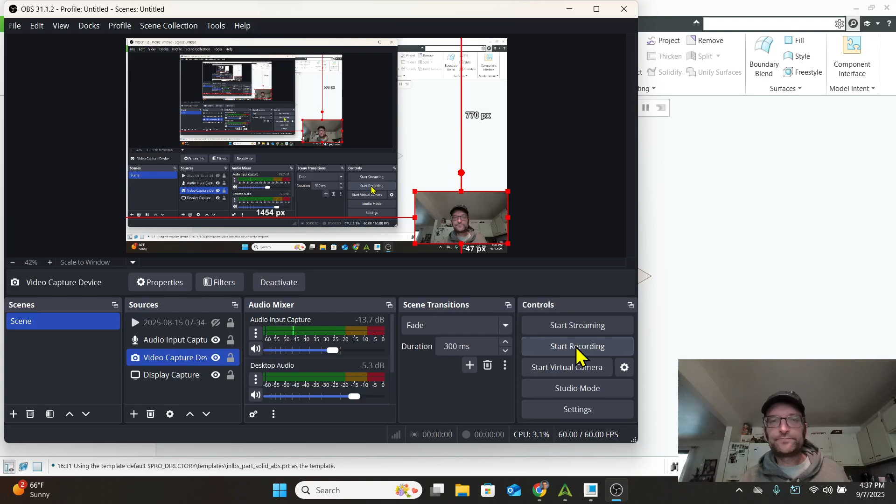All right, and here we are. It is just a week before our midterm exam is due. Our midterm exam is due here for the fall of 25 on September 13th at 11:59 p.m. for students at Elgin Community College. That leaves us about a week till the midpoint of our course, which over 8 weeks goes by very, very quickly. So the midterm is our next hurdle. So let's go ahead and take a look at it.

So here is the midterm exam. We can find that midterm exam on D2L by going to assignments, scrolling down to midterm exam, and clicking on the PDF attachment there to bring up this document. And first thing we're faced with is the 4 required elements of this midterm and their associated point values. All together, we're at 300 points out of our semester's possible 1,000 here. 4 components of this midterm.

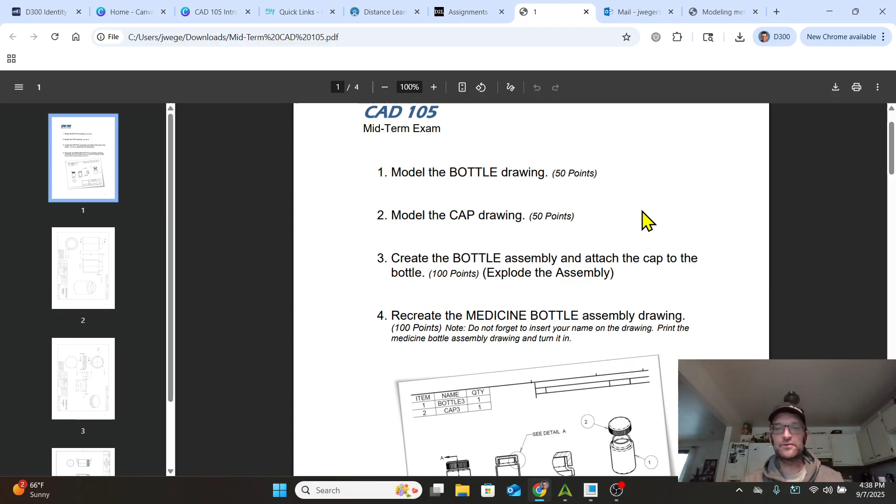The first being to model the bottle itself. That is 50 points. And then we're going to model the cap, another 50 points there. And we're going to create a bottle assembly from those 2 parts and then explode that assembly for 100 points rather on that one. That's pretty generous, 100 points for that part.

And the last part is to recreate this medicine bottle assembly drawing shown right here. And that to be done with the inclusion of your name so that I know who it is, and a couple of other new things in here as well. 100 points there, 100 points there, 50, 50, it gives us 300. So let's dig into it and take a look at it, starting with the bottle.

So the bottle itself is a hollow bottle. We're going to have what would look like a screw-on cap, much like a medicine type of bottle, a screw-on jar. But we're not going to be dealing with threads, thankfully, for a lot of you here. But we have a hollow bottle that has walls of 100 thousandths, max diameter here of the lower portion of 2 inches.

The upper portion is 1.5. Overall height to the shoulder here is 2.5, and the height of that shoulder where the cap would attach is 1/2 inch. And that's really all that we need to know, other than a couple of fillets on here. And there are a couple different ways to do this.

You could do a revolve. You could do a simple extrusion, create the bottom part, extrude, and then add another sketch to the center of the lower one and do that. Whichever way you want to do it. I'm going to do it as a revolve. I think it's probably the little bit more advanced or elegant way of doing it, but the choice is yours. Again, it doesn't matter how you get to the end, just as long as you get to the end and things are done correctly.

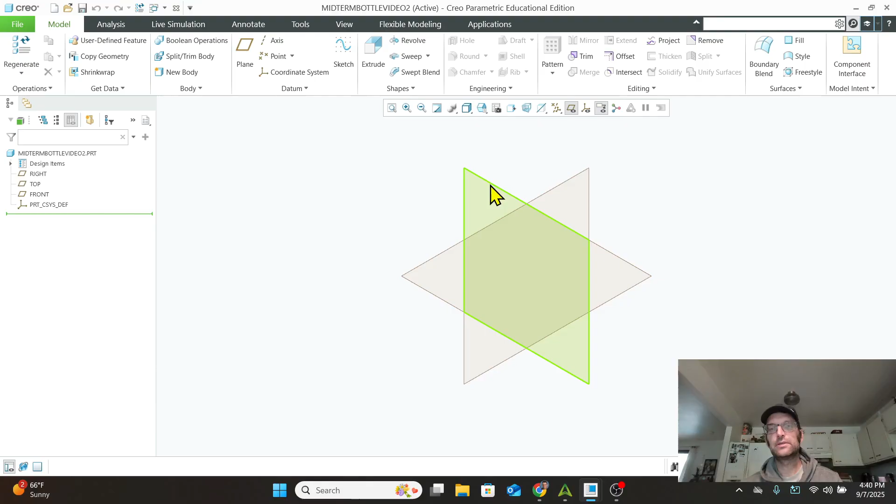Video 2. I started a video 1 before, and the cat went crazy, chasing things around the house that weren't there, playing with toys, and things kind of got sideways.

So we're starting over. All right, so we're going to start a sketch on the front plane. And we're going to change our viewpoint so that we can see the front. We're going to zoom in a bit. First thing is we're going to add a center line for that revolve feature. We're going to get into the line tool. We know our diameter of our part is going to be 2 inches overall. So that means a radius of that is going to be 1 inch.

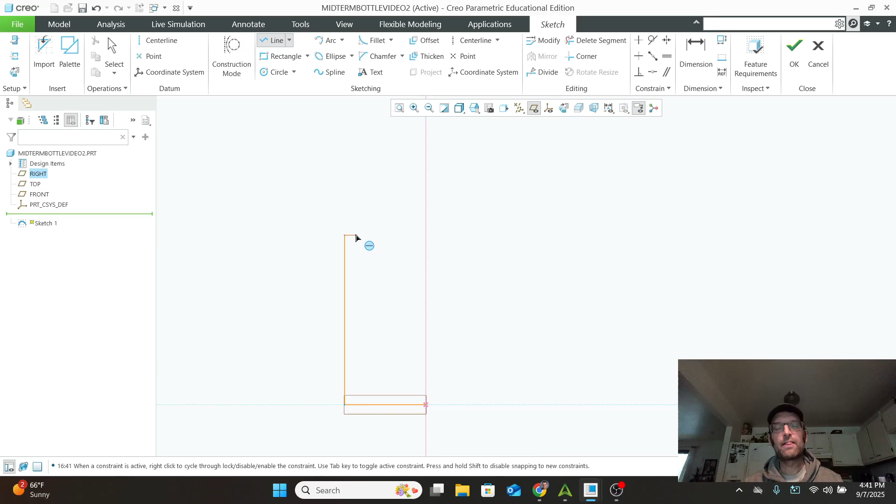And now we're just going to go and draw the rest of this thing. Whoop, not a center line. A regular line would be better. Get that looking pretty good to scale. Okay. Double click on that center to get out of there. So we know that this is supposed to be 2.5 tall. And this right here is 0.5.

And then we need some rounds. So our corners are rounded here, here, and here. I don't think the top was. Yep, nice and flat. So we have a round right here. Okay, we can see that right there. One right there, and then one right there.

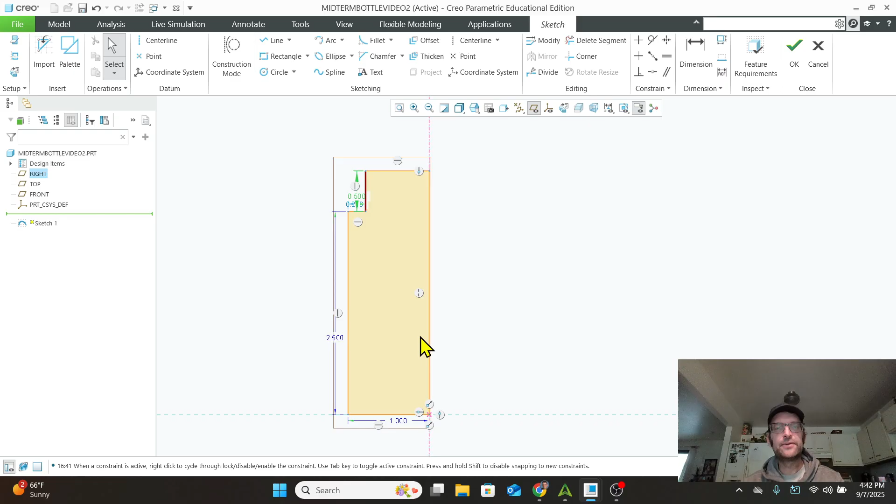All right, so let's add those three into our original sketch. It's probably just going to be a little bit quicker that way. So we get into our fillet. And then we're going to pick our two lines, set that radius, 0.5.

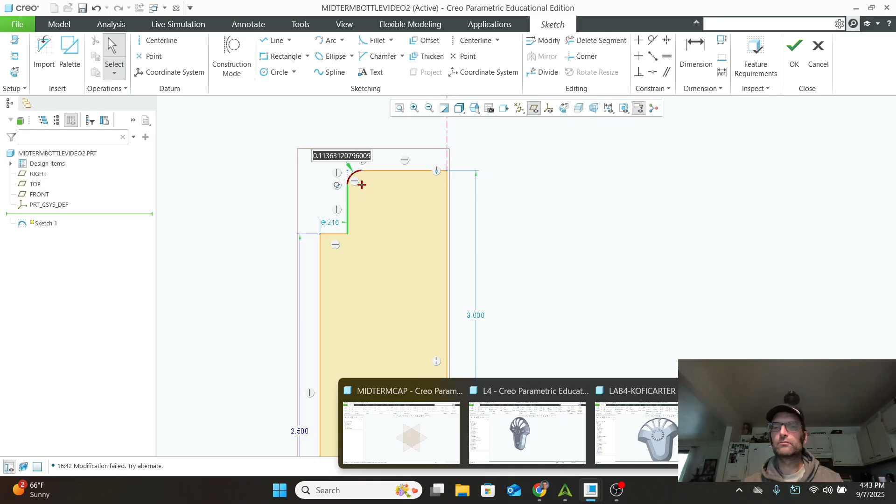Apparently the 0.5 isn't right because that's way too darn big. Yeah, it's 100 thousandths, 0.5 isn't going to work. That's what happens when you try to put in a round or a feature or make an edit to something that doesn't make sense mathematically. Creo's going to go, hey buddy, you sure you want to go ahead and do that?

All right, so let's add the rest of those fillets here and here. And we can go down here, fillet again, there and there. Let's zoom in and let's use our little cheat and do an equals.

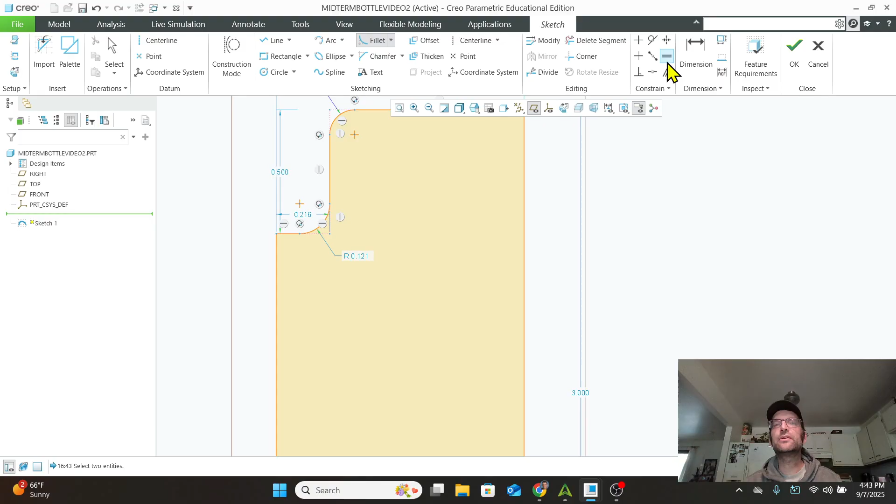So we're going to pick that, and we're going to make that one equal. So click the one you want to be essentially your master dimension, and then you're going to hit that equal sign first. The first one that's going to be the one that everything else is going to follow. And then you just go through and click on these other ones, and they're all going to follow that 0.1 so that they're all the same there. And we're going to hit OK on that sketch.

Let's go ahead and revolve that sketch. It's going to revolve around that center that we put there.

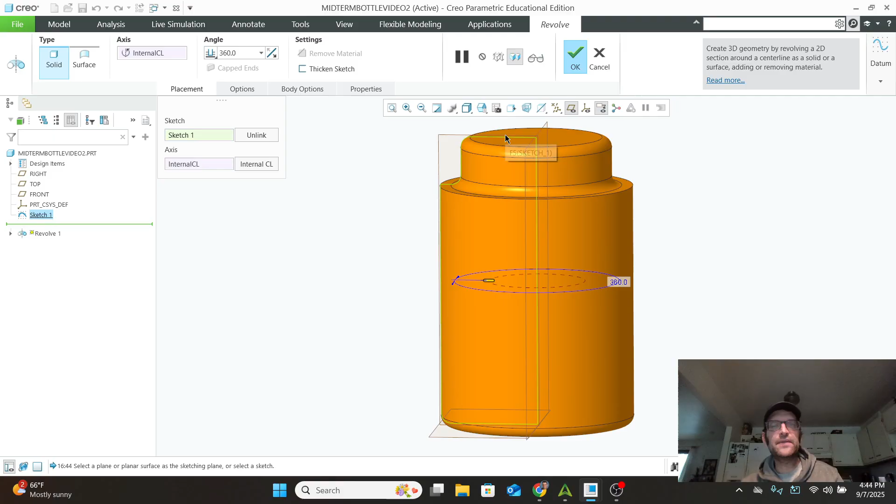Oh, look at that though. We put it at the top. We don't want that. So let's go back here. Let's hit OK on there. Let's go back, it's all right. We go back to the sketch and go back and edit there.

And that's gonna really cause us a problem though, isn't it? Because we're going to do a fillet there and there. It's gonna be 0.1. Okay, and then we're gonna have to come here and delete this one because...

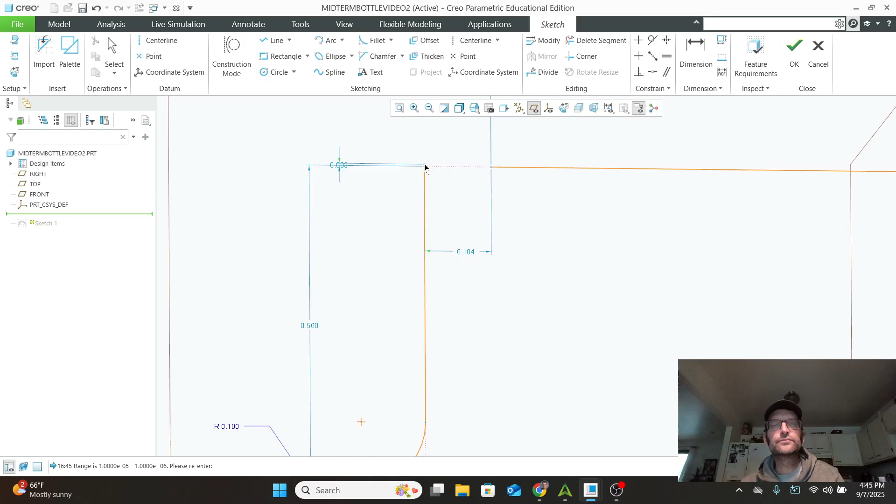Let's go ahead and add a line there. Boop, boop, close that thing off. All right, so now let's look at that and see if that looks better.

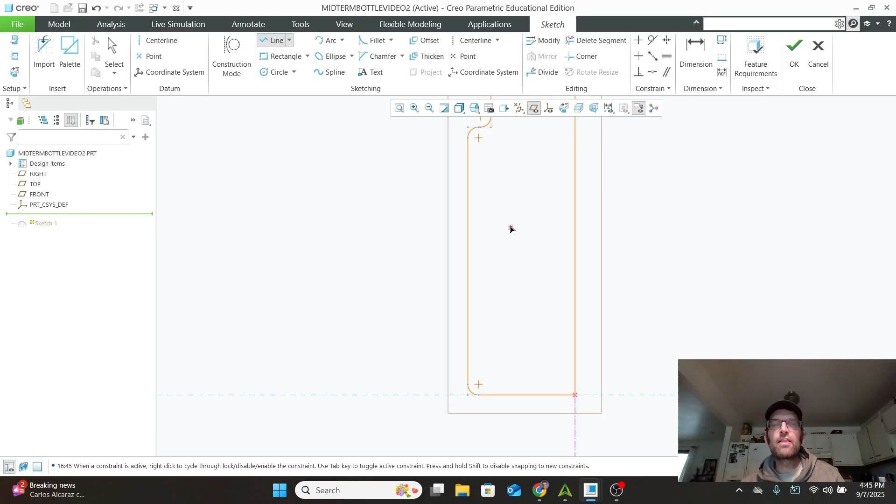Okay, so we still have 100, 100. Let's make sure that one at the bottom is 100 as well. That's 100 as well still. Okay, all right, so we got that. Hit the OK, updates our model.

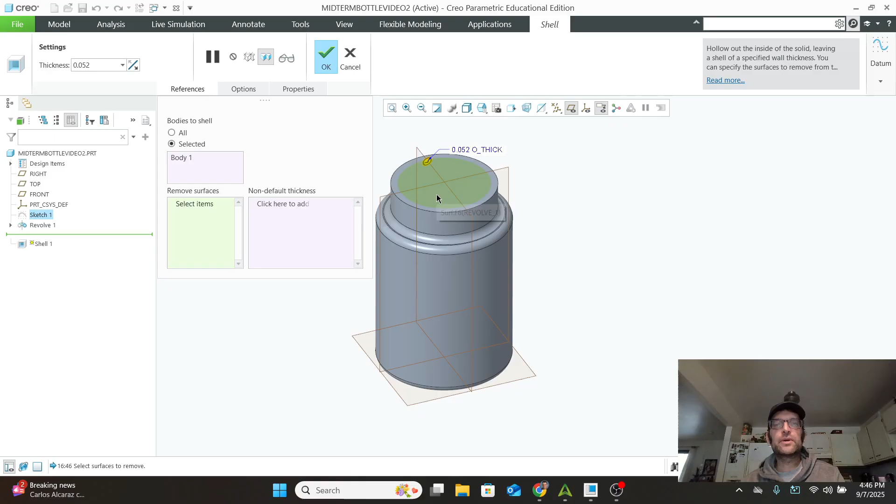Okay, there's our bottle so far, looking pretty good. We just got to go ahead and shell that thing, hollow it out. We're going to click on that open face on the top there where we want that hole to be. We're going to go to our options, properties here, and we're going to change that thickness to 100 thousandths. We're going to hit OK and turn off that, and we are good. We have a bottle, it is hollow. It has fillets in the places, rounds in the places that it's supposed to. So that is good. All right, part one is done.

Let us go to the cap. All right, so looking at the cap, we have a couple things going on here. We have an overall diameter of 1.9. So the widest here, we have a center opening of 1.5 inches. It's going to fit over the top of that bottle. We have a diameter of 1.8 from here to here.

And then we have a pattern of rounds, 50 of them, which are going to travel around here, so that we have that like knurling, that texture on there, so that when we go to open up the cap, we have something to grab onto. So we're going to create that with an axis pattern, would probably be the best way to do that.

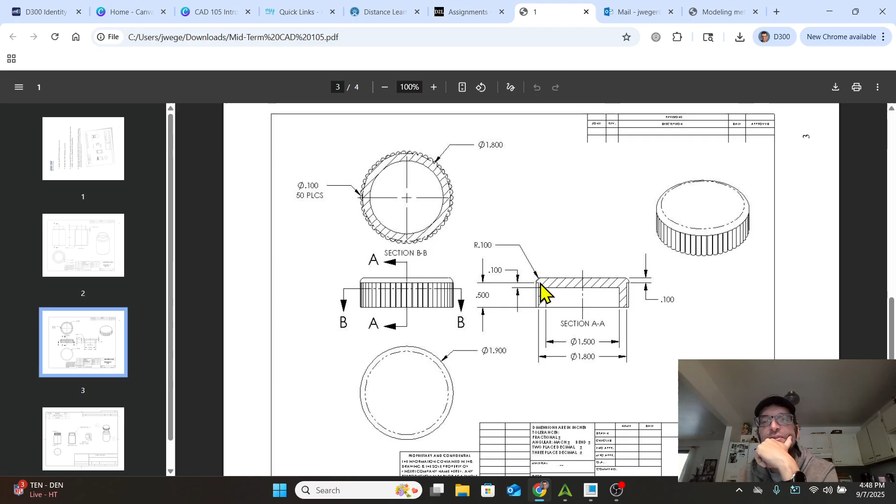And we have a thickness overall of 1/2 inch, so 1/2 inch from there to there. And then we've got, let's see here, we've got 1/2 inch there. And then we have 100 thousandths there to there, and 100 thousandths from the top of that to there, where that opening is. All right, so let's start off.

We need 1.8, and then those circles of a diameter of 100 thousandths, so 1.8. Let's go. And we have a new file, a new part file, midterm cap.

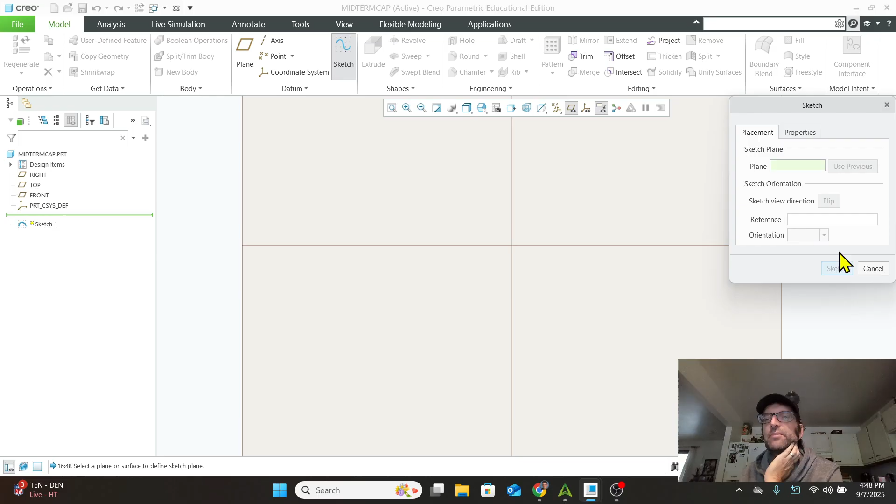I'm going to turn my planes back on. I'm going to go ahead and get myself to... let's go to the top this time. I'm going to draw on the top this time. All right, and let's get into a sketch. That's going to be on that plane right there.

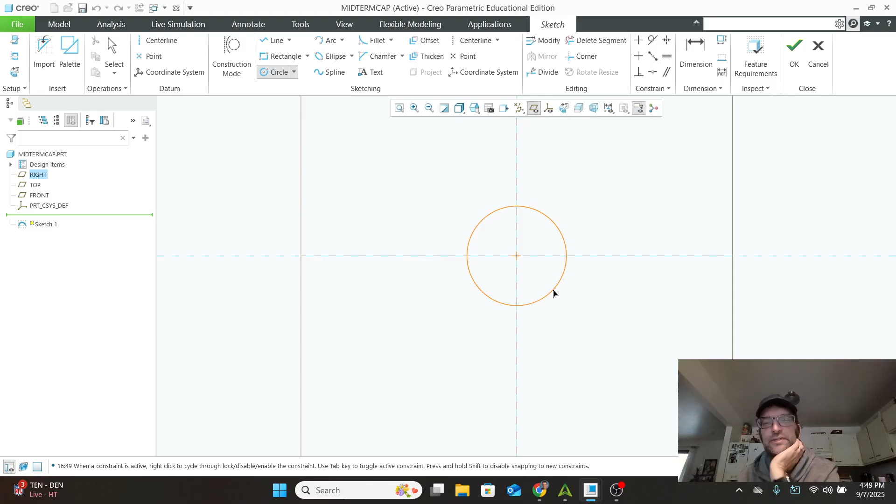Oh, we're already into the sketch. That would probably be helpful there. All right, so we're sketching on the top. All right, let's get in here. Let's get a center diameter circle. Go right onto that origin there. And we're going to set that. Circle, left click to start, left click to end, double center. Make that a little bit smaller at 1.8 inches.

Let's go in and let's set up this pattern now. All right, so we're going to do another center. And let's double click on that. So it's supposed to be 100 thousandths.

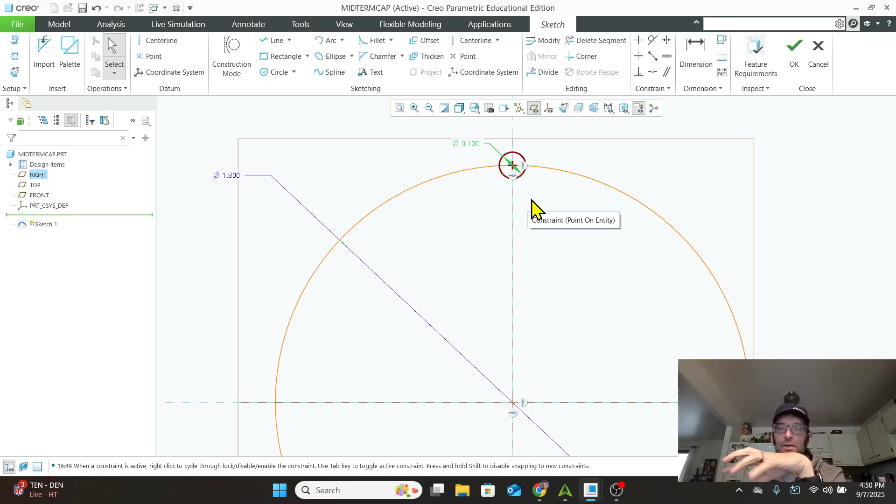Okay, let's go ahead and trim this guy off. So we can either pattern this in our sketch and sketch out those 50 instances, or we could do it, extrude it now, and then go ahead and copy that feature on there. I'm just going to go ahead and do it in the sketch. So let's clean things up a little bit, delete this segment because we don't want that. We don't want that one there, and we don't want that in there or that there. We want that nice and open.

Which way is going to be harder though? I think we're going to have to do a lot more work if we do it inside the sketch. Let's go ahead, let's hit OK. Let's extrude.

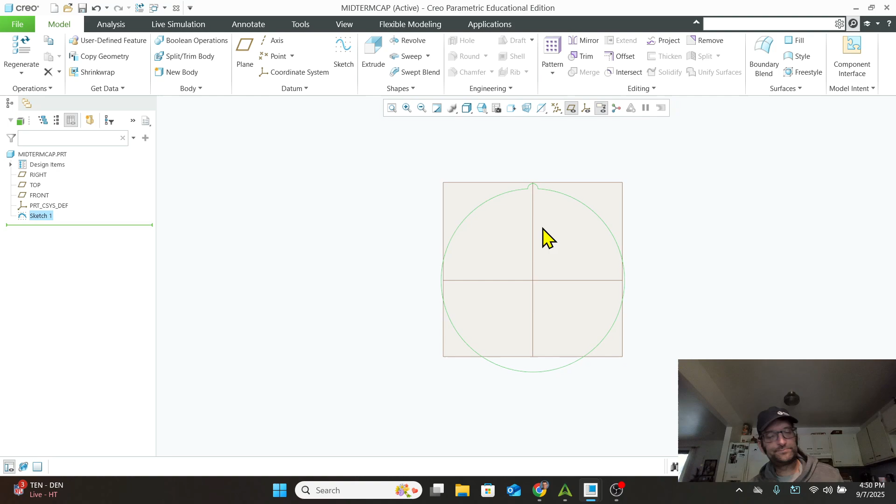Let's do something else here. Let's do that sketch again on this top plane. And let's just create - we're all about efficiency. If we do the sketch and go through that way, we're going to have to edit a whole lot of circular features and cut out and just do all kinds of extra work. So let's take this the quick way. Sometimes it's fun to take the long route, but we're going for easy today. Let's get this thing done.

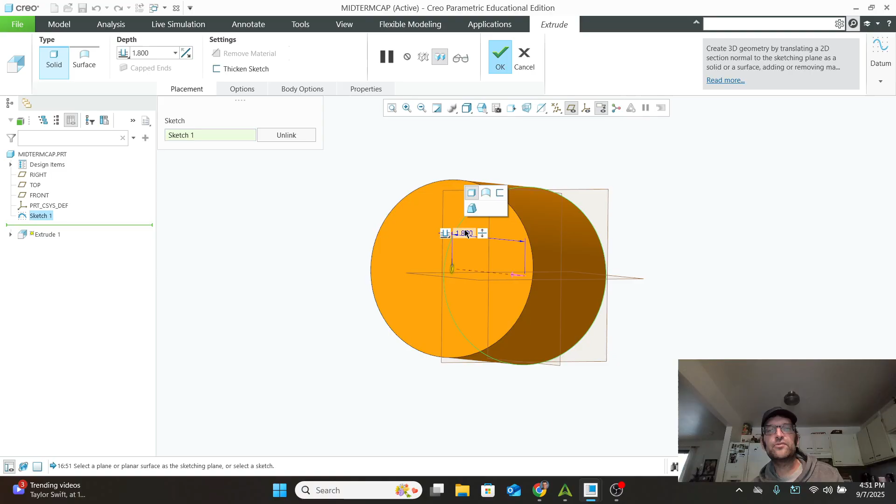Let's go ahead and extrude that thing to a thickness of, what was it, 1/2 inch? Pretty sure that's what it was. Let's make sure - so 1/2 inch for right there. Yep, 1/2 inch. So 1/2 inch, 0.5, enter. We're going to hit OK. We're going to go back to that top view.

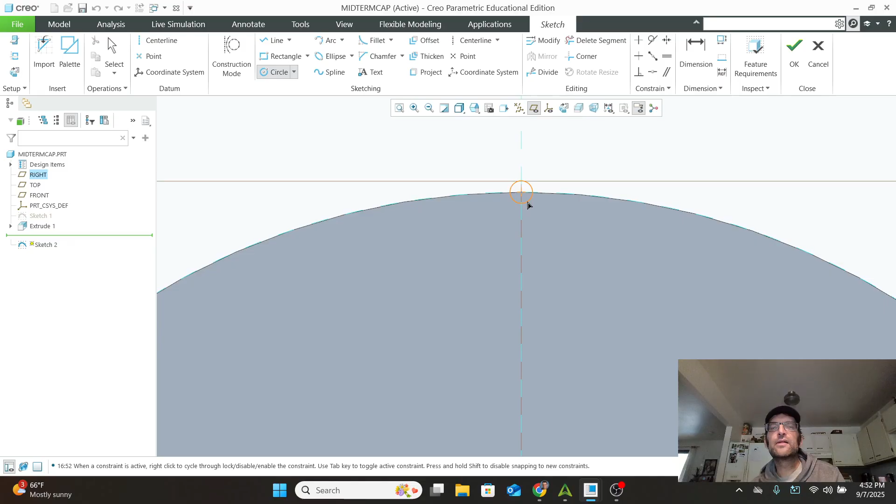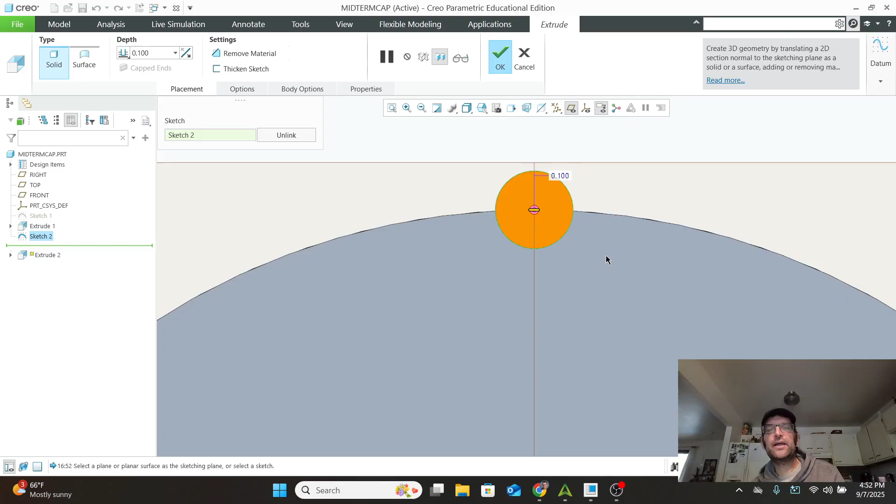And we're going to go create a new sketch right on top here. Okay, and we're going to draw a center circle, left click, go 100 thousandths. Let's go ahead and hit OK there. Let's extrude that guy. Let's go back that way. We're going to go 1/2 inch. We're going to hit OK.

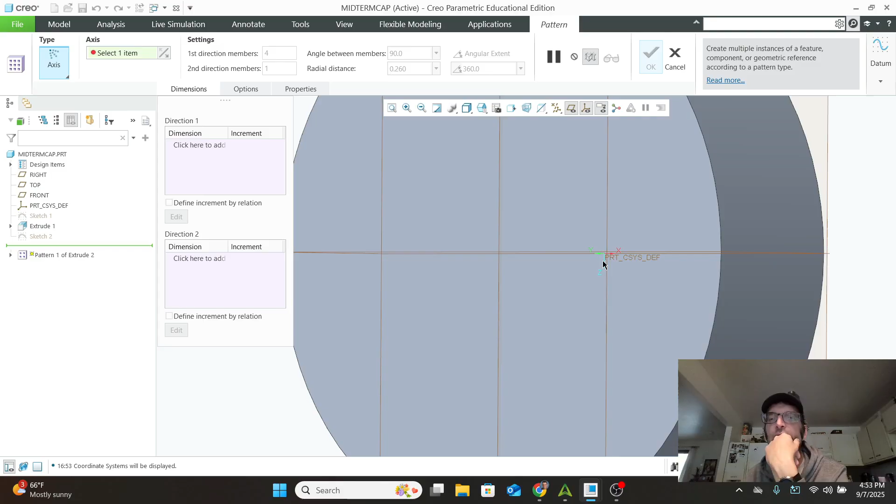And then let's go ahead and let's make a pattern from that extrusion. So let's make sure that extrusion 2 is highlighted. Let's go back to our top view so we can get a good look at that. Got extrusion 2, we're going to do a pattern. We want to do an axis pattern. Okay, and let's turn on CSYS. So we're going to grab an axis because the first thing it wants us to do is tell it what axis - I'm going to choose the Y.

Okay, go back over here. How many instances do we want? We want 50 of those. So the distance between those is going to be 360 degrees in the circle divided by 50. 50 instances, center is at y-axis. We see the 50, the preview of that there. And let's go - okay, boom. There we go, all right.

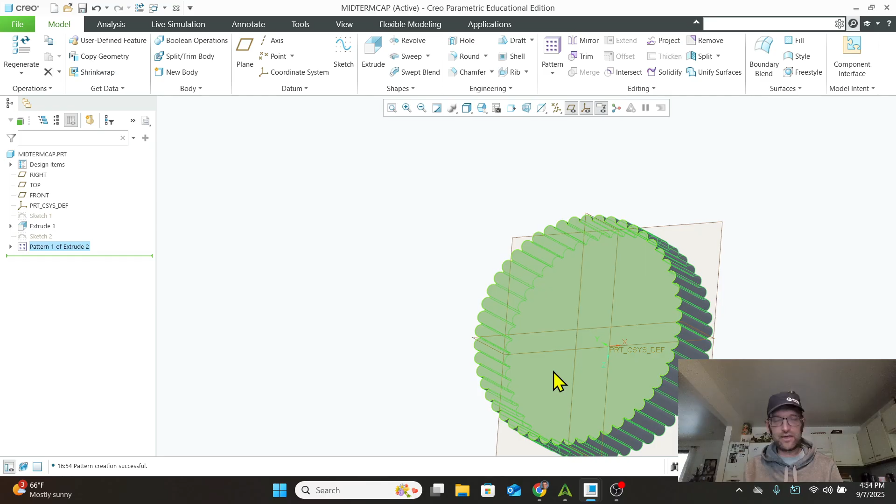So we got that texture on the side. Very nice. Let's go ahead and go back to the top so we can see that nice top view. I think I've probably had enough of looking at the CSYS - it's really all I needed for there, and also the plane.

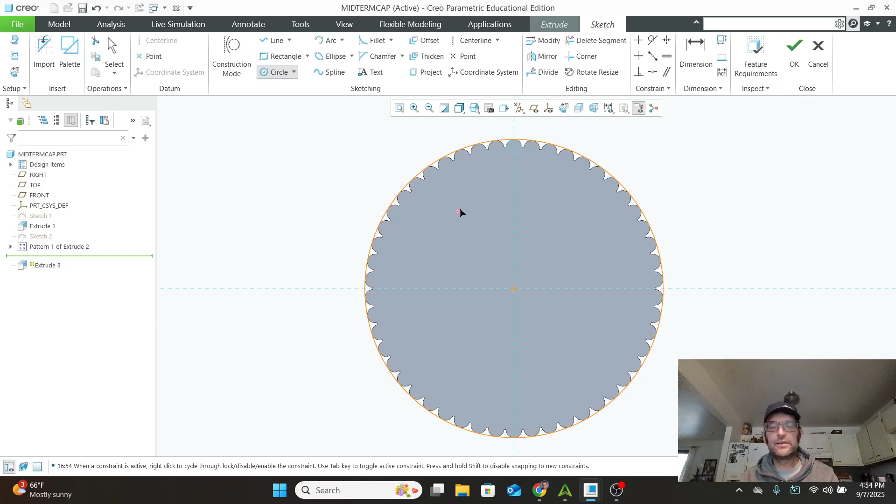So let's do another extrusion. We're going to do that right on top of here. The circle that we're going to extrude, it's going to be 1.9 diameter, which is going to be that 100 thousandths plus the 1.8 from here across to there, right? Or we could just click and we'll grab that quadrant point of that circle instead of putting that dimension in. I'm going to hit OK. And there we go - it's going to try and extrude it to 1.9.

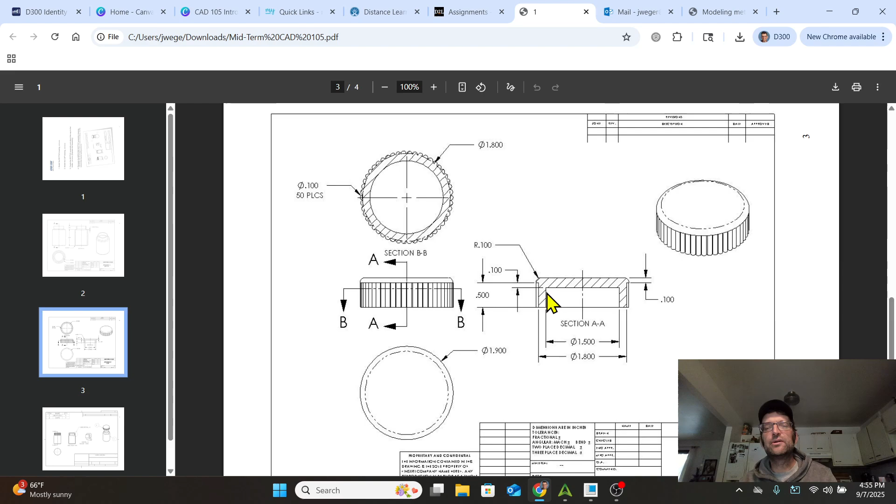We don't want a cap that's quite that thick, though. Let's double check - I think it was 100 thousandths. It is 100 thousandths, 100 thousandths with a radius on there too, so with a round on there as well. Okay, so let's get that in there - so we're 100 thousandths here. 0.1, enter, let's hit OK. Those two are going to join together.

Let's go ahead and add a round to this edge. That radius is going to be 100 thousandths. There we go, we got our cap.

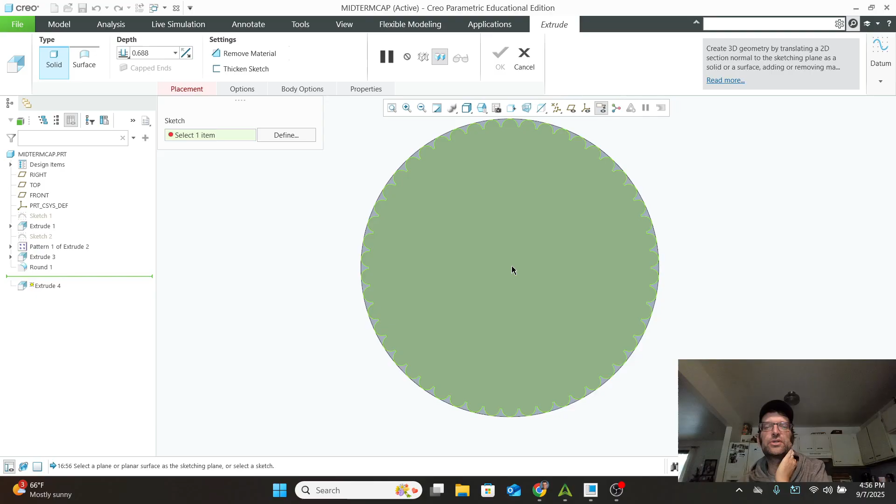We do need to put a hole in the middle of this. So let's look at this from the bottom, so we're looking nice and straight on. Let's go ahead and do an extrusion on this face. We're going to go right at center. I'm going to do a circle.

That dimension of that circle is going to be 1.5 wide to fit over the cap. And then the depth of that, we have 100 thousandths from here to here, and then from here to that start point there is another 100 thousandths. So we have 200 thousandths subtracted from our 0.5 plus our 0.1, so 400 thousandths on the depth, right? Or we could just go 0.5 minus 0.1, would probably be the easier way to do it. But there we go - so 400 thousandths, 1.5 inch diameter on that one.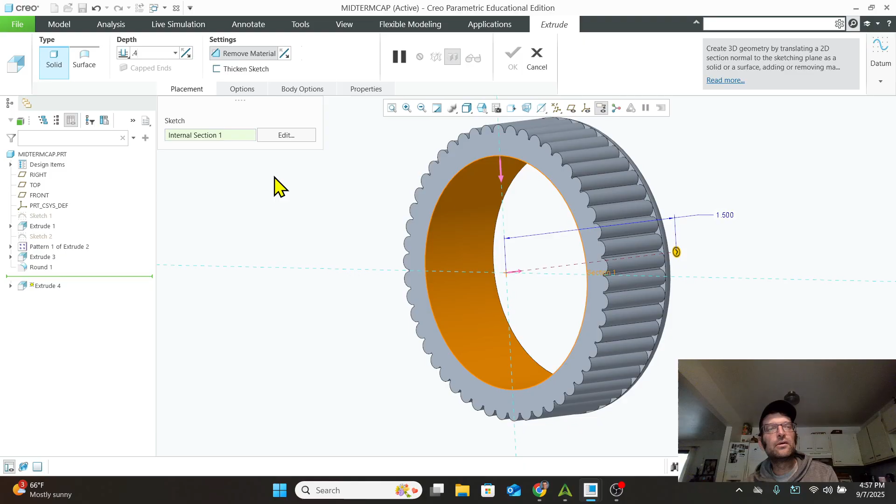All right, so let's double click there. We got 1.5 diameter, we hit OK. Get our extrusion, going to be 0.4. We're going to flip the direction around so that we are taking that out, only 0.4 though. 0.4, we're going to remove material and we're going to hit OK. And there is, ladies and gentlemen, our cap for our bottle.

All right, let's go ahead and make sure we save that.

I'm going to get that into a different place, and I would suggest you put these into the same place. We want to start a folder because we're going to do an assembly, so we want those parts in that assembly folder. We also want to put the assembly file in there, and then we'll put the drawing file, all in the same spot.

I'm going to make a new folder and call it Midterm Video. I'm going to save the midterm cap there, then go ahead and get into my bottle, and save that one into Midterm Video as well. Hit OK there, and I have those two things done. All right, so those two are nice and done. That's 100 points - we're a third of the way there.

Next 100 is going to be for the assembly. Always an interruption - somebody walking by in front of the house, the dog's got to let them know, not in my neighborhood kind of thing.

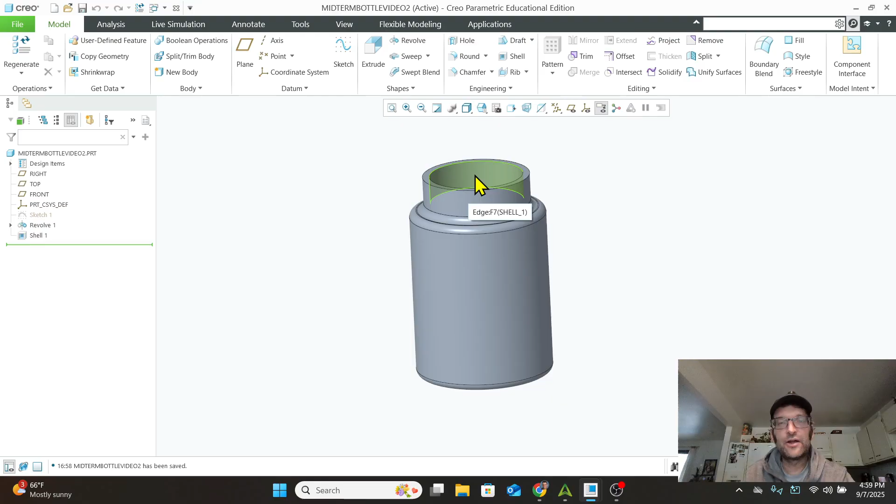So here we go, we've got our first 100 points done. Next one is going to be for the assembly. File, new assembly. Call it bottle assembly video.

Here we go, we're going to do a bottom-up assembly because we're creating it from existing components. We're going to start off right here. First part we're going to grab is the Creo file, which is going to be our midterm bottle part. We're going to open that one.

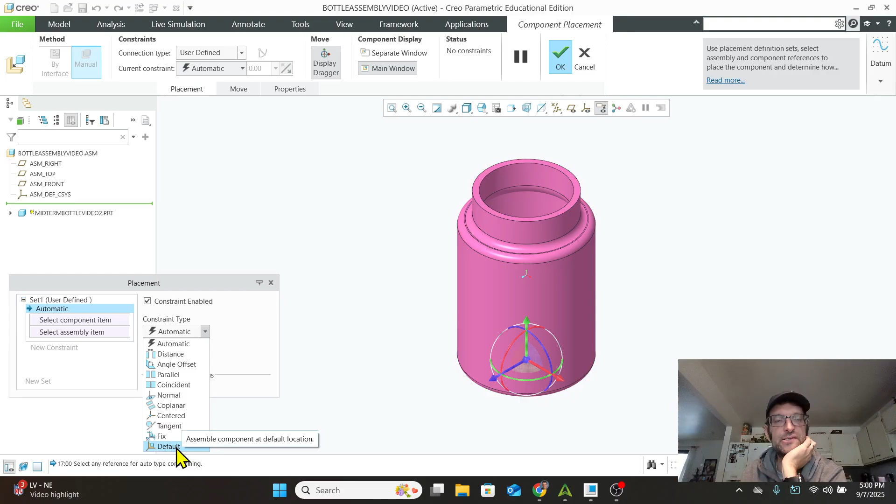Remember, when we add this and put this in, when we're creating these assemblies - when we set this up by doing the revolve and setting up the cap right on the top, and this was on the front as a revolve - those things are already aligned and lined up around the origin, the CSYS. But just good practice is to go ahead and go to default for this one. We're going to hit OK and drop the bottle in. Okay, got the bottle there.

Then let's go ahead and grab our second part, which is going to be the cap. We're going to hit open. And if we flip that guy over to default, notice that it disappears because they're right over each other. Isn't that convenient? But we can leave it, I just want you to see how that is, and why that benefits you.

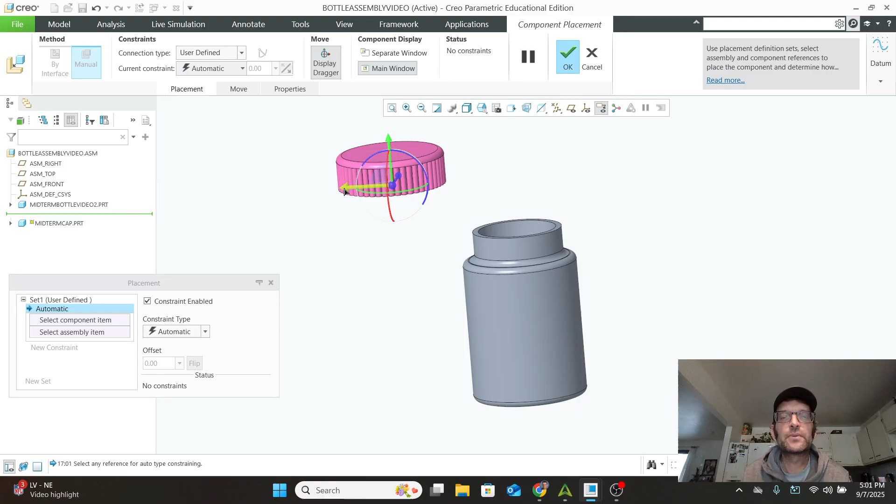I'm going to hit Control Z and not do it that way though. But we have this one on default. We're going to get this one generally into the location. Remember, we have those 6 degrees of freedom, those 6 axes in which we've got to go ahead and limit our motion on things. So we want this over here, and we're going to go ahead and set up that as a constraint.

So those are coincident. Then we're going to go ahead and say we want an additional constraint, so click on New Constraint. We're going to click on the top face in here, scroll down, and click on the top face of that bottle. And that's going to be coincident - they're going to sit right on top of each other.

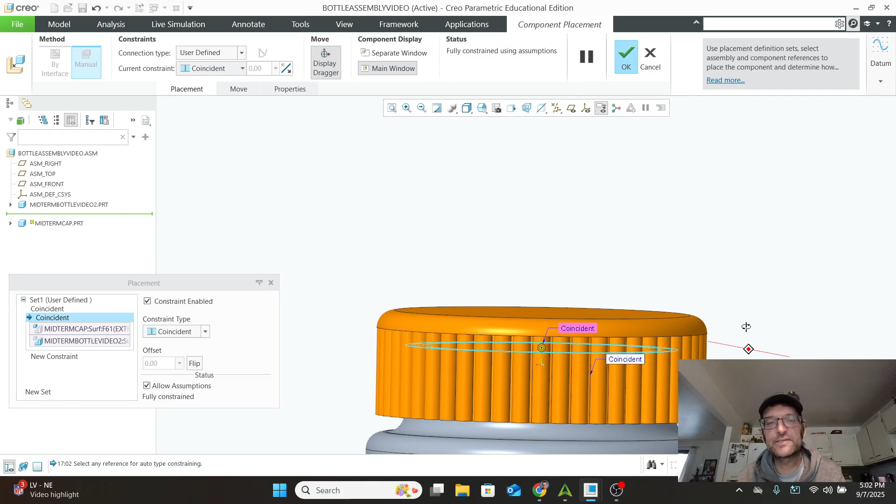Very nice. Sometimes remember that we'll go in there as a distance one and leave them set apart from each other - you can just go ahead and use the distance one and set the distance to 0. Whichever way you want to do it, coincident or distance of 0, it all gets us the same thing. So there we go, we have the assembly, more or less. We just need to go ahead and do something with that, right? So we have to go ahead and do an exploded view on that.

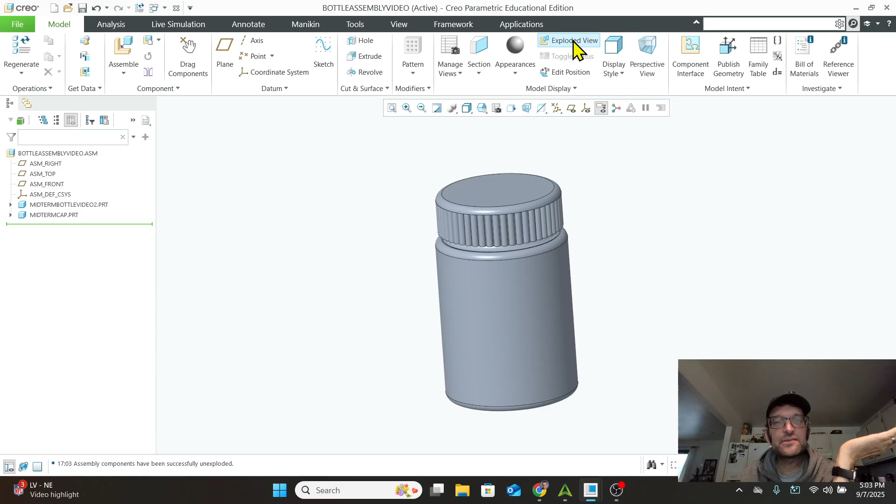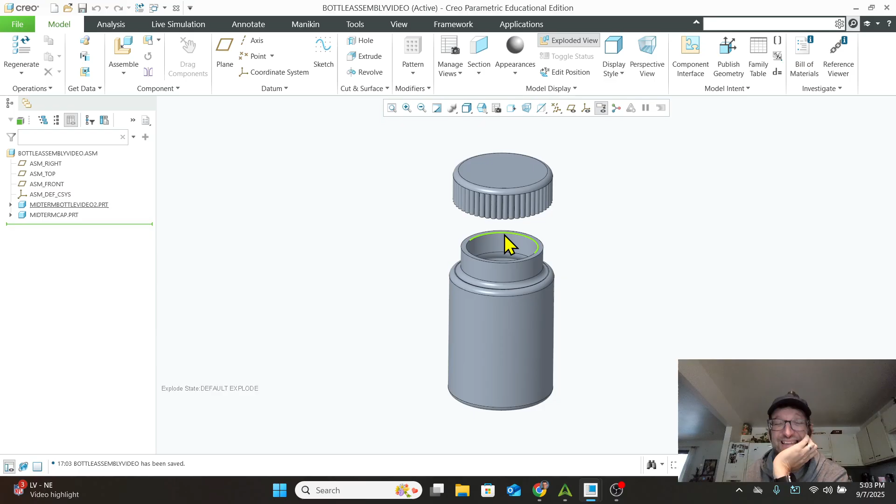Okay, real nice, all we got to do is click it. Creo does a good job for us. That's nice, that's beautiful, fantastic. Good, okay, make sure we save that. We save it into that folder that we created with our other stuff in there. So that is there, that is done. That right there, ladies and gentlemen, is 100 points of this midterm. So we're 200 points down.

All right, last 100 points. Here we go into the drawing. So we need to recreate this drawing. So what do we need here? We need to zoom out a little bit so we can see everything at once. So here is our primary view, right? We need to set up a multi-view drawing here.

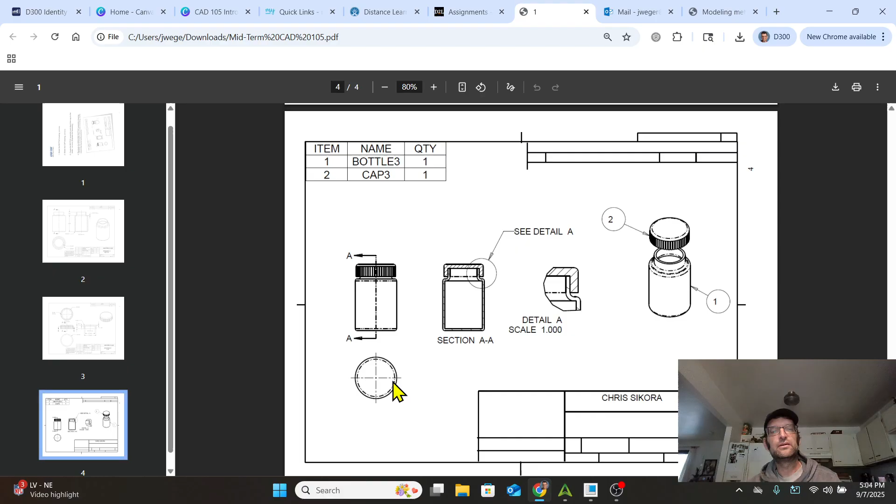Really, we're not doing a whole lot - we're just kind of doing a main view right here, a most descriptive view. Then down below it, we have a top view, or a bottom view in this case rather, which either one of those is going to look very similar. Notice that it does have a center mark on there, so we do need to include that. And we are sectioning, doing a sectional view of this view here, showing this to the right of that.

So that means we're going to project a view over here, and then we're going to create a section using this parting line. And then we're going to do a detail view of this joint between the cap and the bottle, just to show that in a little bit further detail. Then we're going to include that exploded view of the assembly over here.

And then we're going to add balloons for the parts, and we're going to add a bill of materials or a list of those parts there. I'm just going to do that simply by manual ways. So we got to create a drawing from those things. So let's go ahead, back into Creo, File, New. We're going to do a drawing, and we're going to call this the Midterm Bottle.

And we're going to use, I'm going to uncheck that default template. Nope, I'm going to give it a better name that hasn't been used before and call it video. We're going to use a template, excuse me. Nope, cancel, nope, cancel. Yes, we're going to start that again.

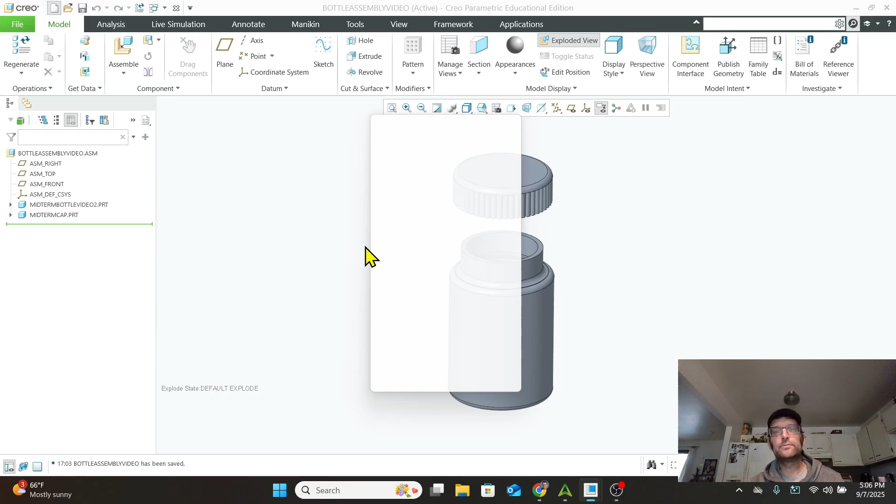File, new, drawing, model, assembly, video. We're going to do empty with format. We're going to choose the A size. We're going to hit OK. And we should have this A size sheet that comes up right here.

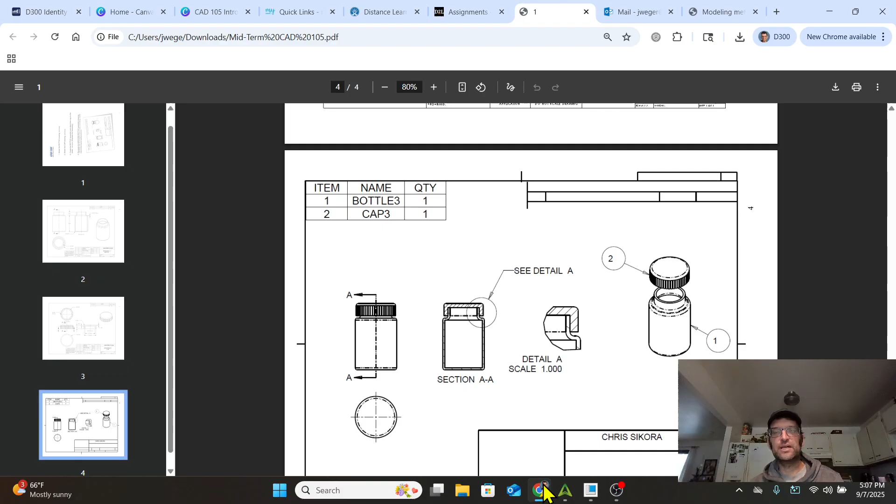All right, so first thing we need to do is we need to place a general view. We're going to default all of those. We're going to click where we want that to be approximately. Remember, we're going to have probably about the center of the page there. We're going to change that view. We're going to leave that scale. Let's look at the scale of this one. I would say that's probably half scale in there. So we're going to stick with what Creo suggests on this one.

We're going to change to that front view. We're going to apply that, and then we're going to go to View Display. And we're going to change from Follow Environment to No Hidden. And then Tangent Edges Display Style is going to be Phantom. We're going to apply that, and we're going to see our bottle look like that. All right. All right, so far so good.

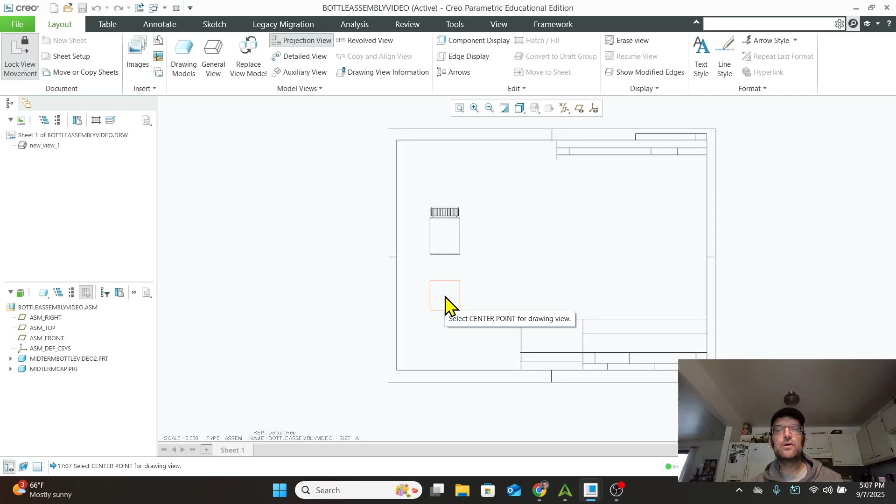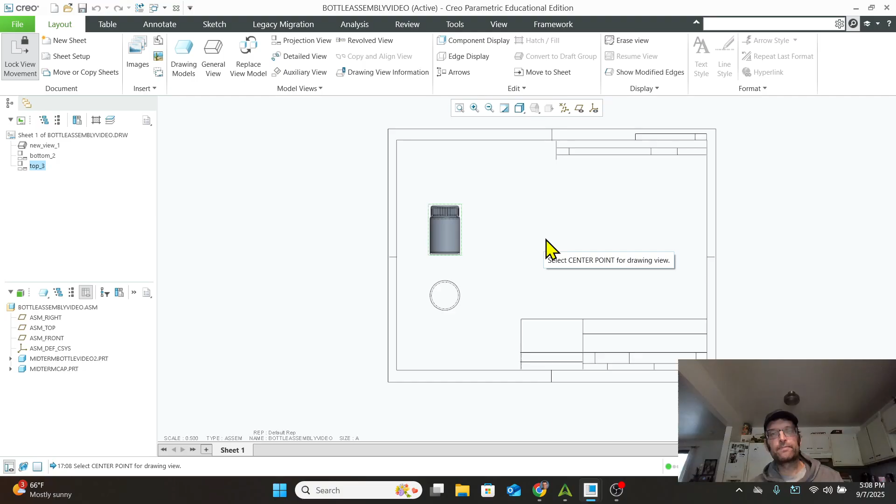Let's go ahead and project some views here. From here, we're going to go down and show the bottom. And then from here, now let's just go ahead and set that up. Display, we're going to do the same thing. No hidden. Phantom. Apply, hit OK. Project again. There. Okay, so project. Oh, let's regenerate that. There we go.

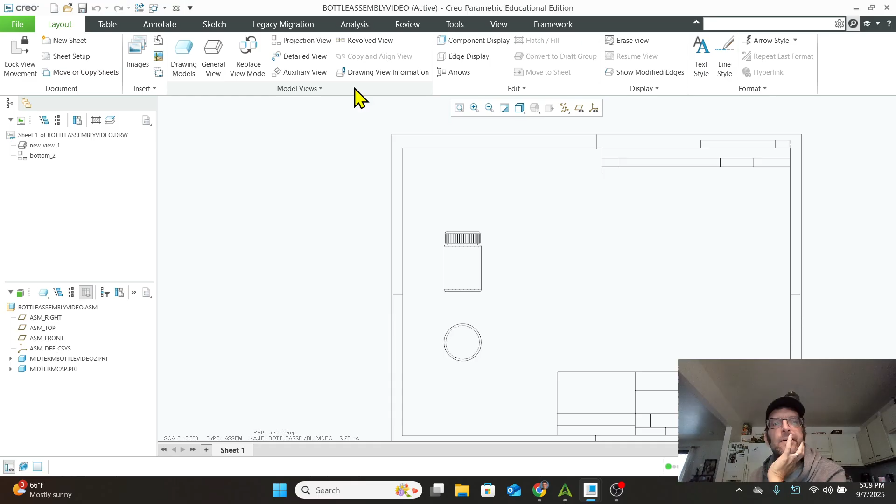It's the quick way. Oh, and lock view movement is on right now, so we can't move anything else. Make sure you turn that off so that if you want to, you can move your views around the screen a little bit. Let's project this one here. So projection, there we go. There we go. So go off to the right. I know it looks the same as this, but we need it.

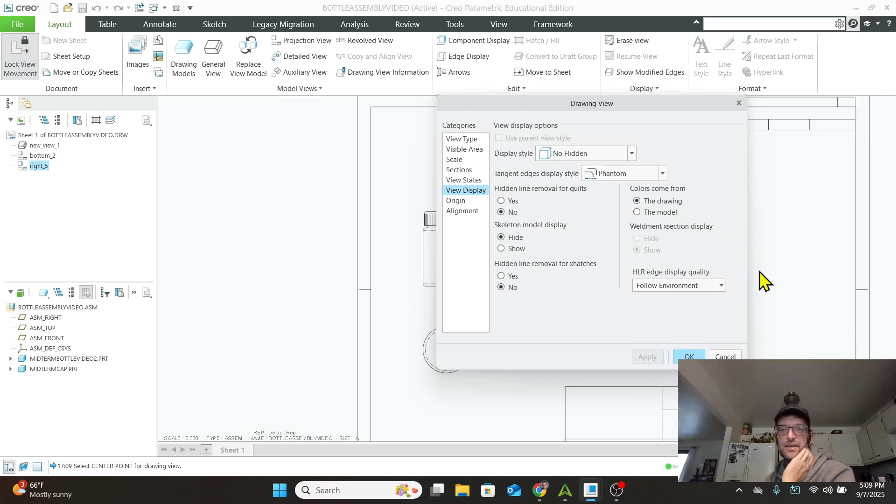So let's change that view display. Hidden, phantom. And at the end of this, when you're done, this should look like that example. It should have all those same elements. We should have all those things in here. So let's go to this one. Let's not forget about, all right, first things first. Let's do this sectional view.

Okay, so let's double click on the thing we're going to cut. Okay, so we're going to cut that. Let's turn those planes on because we're going to need those to pick where the thing's going to be cut. And remember to turn those off at the end because when you print those are going to show on your plans. And if those show on your plans, it's definitely going to be a point deduction from this 100 points on this drawing.

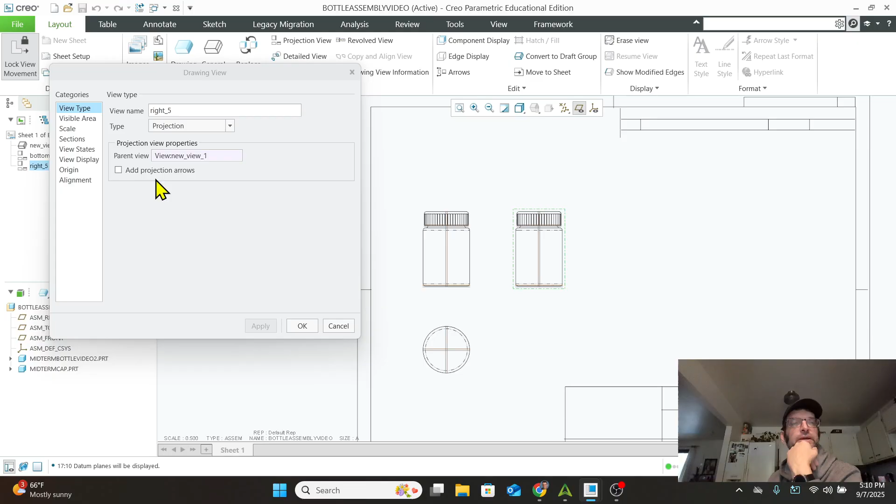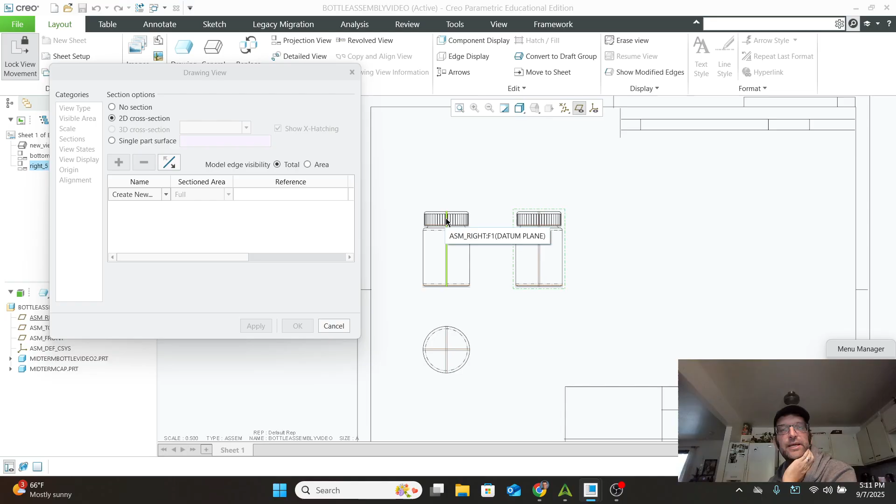All right, so we are going for and looking for sections. We're going to do a 2D cross section. We're going to start a new one. It's going to be a planar. We're going to hit done. And we're going to name it A, that view A. And the setup is going to be from a plane. So we got to pick that plane, which we've picked there. We're going to hit apply. And we're going to hit OK.

And we're going to shut that off right away because we don't want that causing us problems later. And we have our section view. Let's go ahead and move that around a little bit, center it up a little bit better. And remember that when we do this, we need to go in. We've got to go back to the section view.

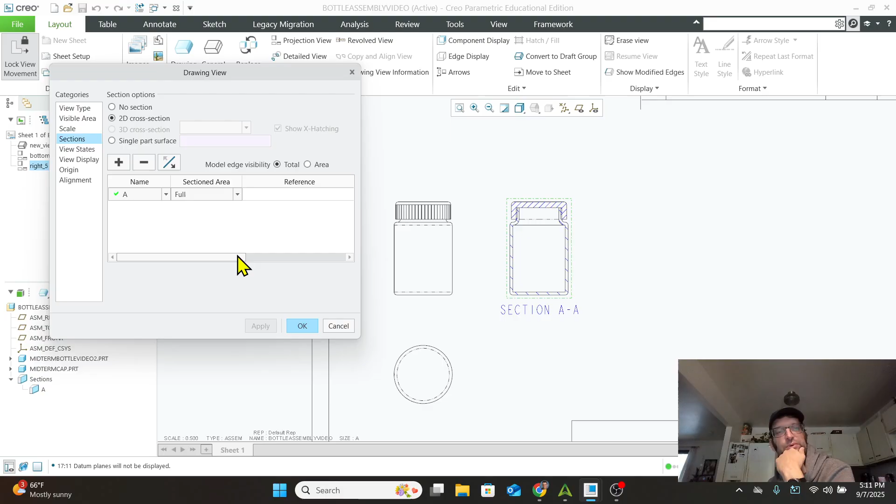One thing that we forgot is in our view display. Oh, per view type, sections menu. There it is. We got to scroll all the way over to the right and choose that arrow display and which view it's going to be on.

It's going to be on that one, and apply that and hit OK so that we have that there. That is a big thing that needs to be there, right? And if it's not there, that will be a point deduction definitely. Okay, so don't leave that one off. Don't lose those points. That's a silly thing to lose points on.

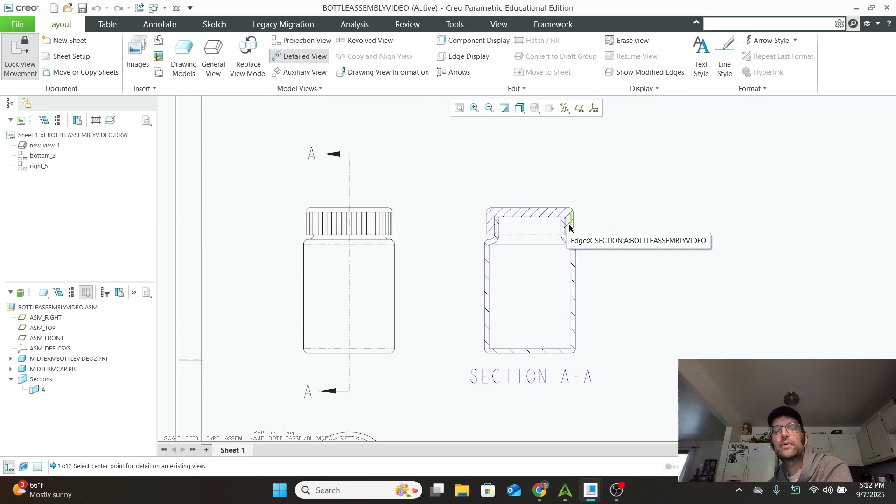All right, so next we have a detail view. So we need to start a detail view right here, kick it off to the side over there. So let's get that done. So we're going to do a detailed view. We're going to pick an object to be the center of that. So I'm going to click right there. That looks great. And let's go ahead and sketch and create that spline to show where that detail view is going to be. Remember, we need 3 sides of it to get it done. It's good.

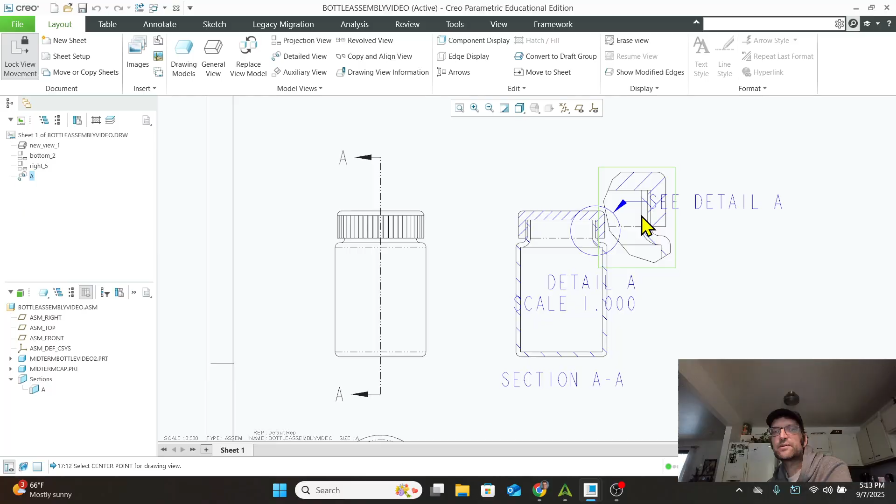Nope, we jumped out of it. Nope, it's there. Let's just regen the view there real quick. Boop. Okay, double click. And there we go. All right, so we've got the view.

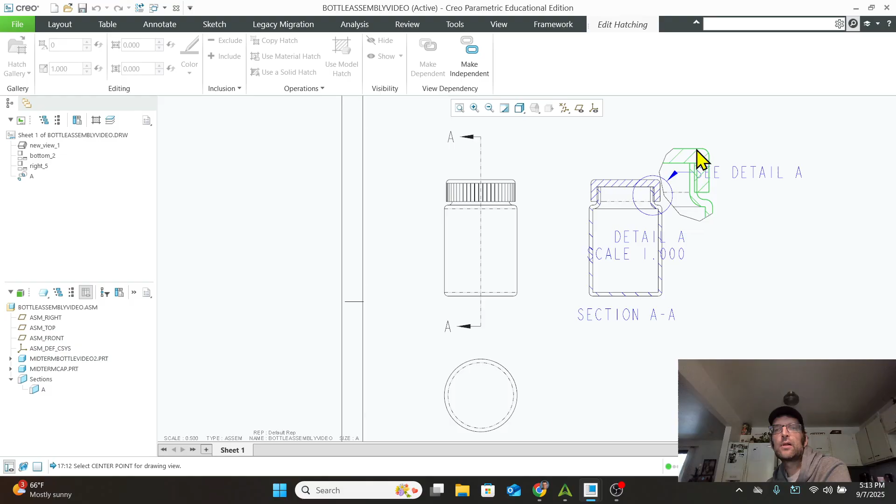There we go. And pull this off to the side. Something like that. Let's get that centered up there. Text is probably still a little too large. We'll remedy that here in a little bit.

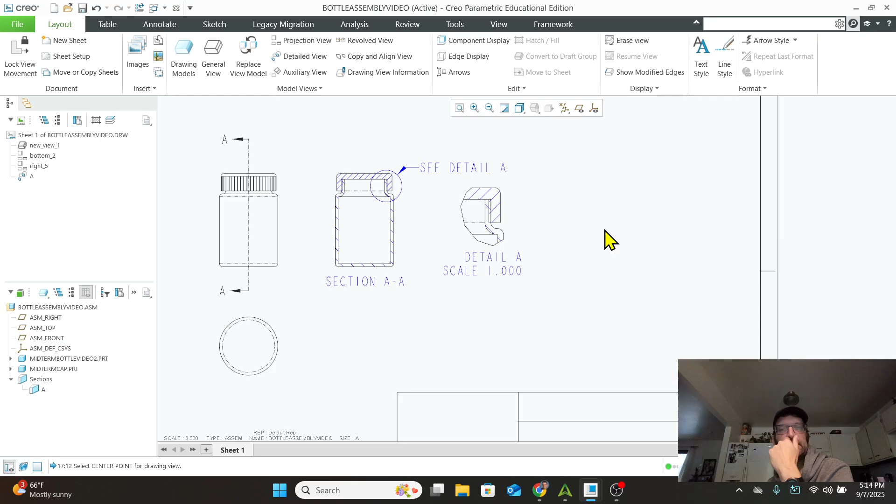All right, so now we need to enter in and get that exploded view shown in here. So let's go to general view. Let's add a view in there. And we want exploded view. Okay, so we got to click on view states, and we got to go under view states and go in explode view, check that box, apply it, and then we'll get that exploded view in there.

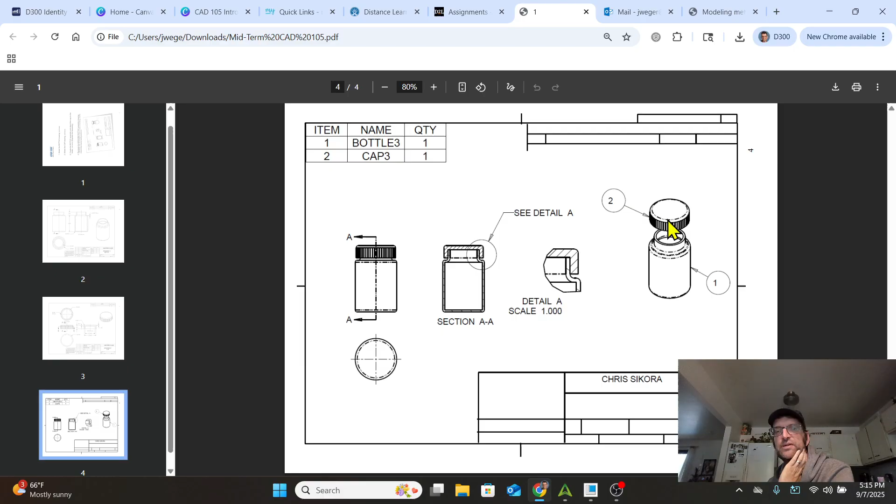And let's make sure here, yep, we're showing that as a drawing rather than as an isometric. So make sure that that's still changed to have the same settings as the other elements of your drawing here do. So let's get that. Let's go to view display. We're going to do no hidden and a phantom on the edges. Apply that. We're going to hit OK.

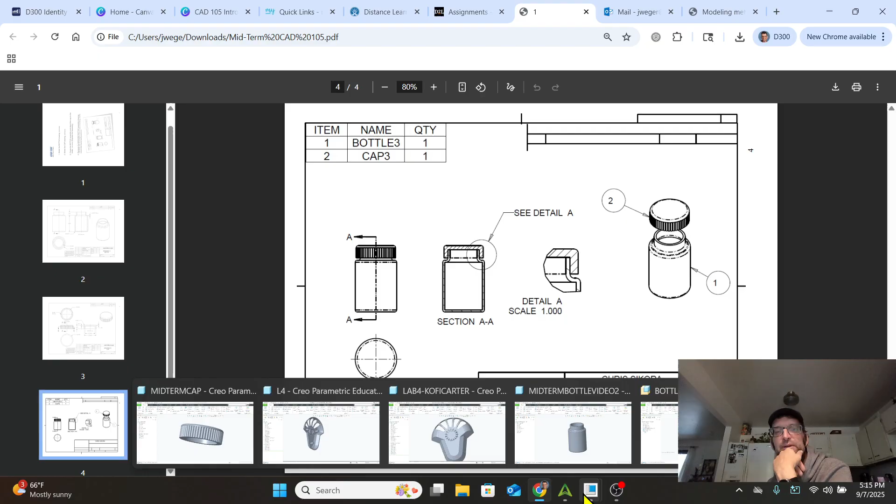Move that down a little bit so it's centered. It's not this way in the drawing, but you could increase that size a little bit. I probably would on this print in most cases just to make it a little bit larger and stand out a little bit bigger, but that's okay. We're going to leave it like the way it is and not overcomplicate things.

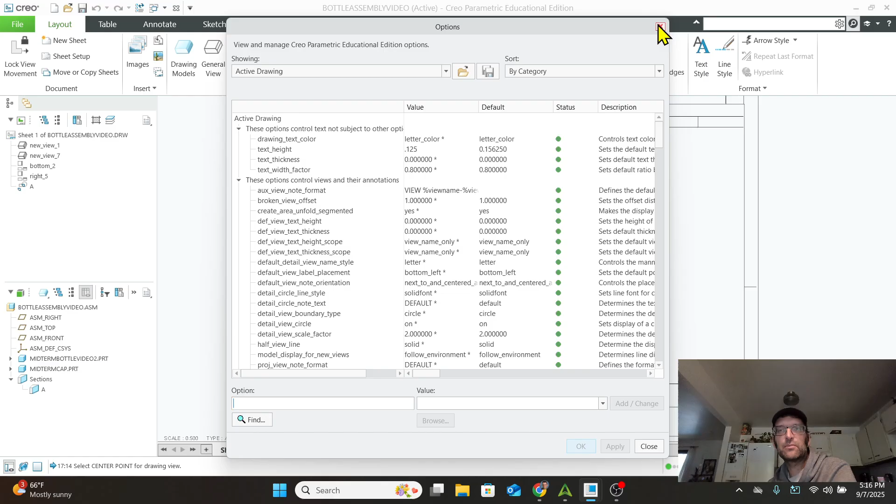All right, so text. Our text, let's go ahead and fix that a little bit, make it a little bit smaller. So we're going to go to the File menu, not our options menu, but our Prepare menu, and go to Drawing Properties. And we're going to click on Detail Options, and we're going to find that text height, and we're going to change that to 0.125. So make sure you change that text height on there to 0.125. Okay, we're going to apply that, and we're going to close this out and close this out. And now our text size makes a little bit more sense for the rest of everything.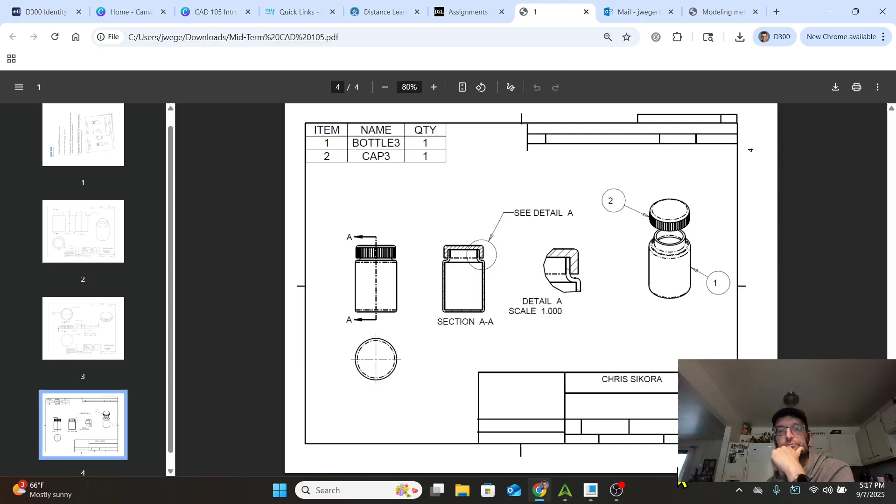All right, so some other stuff we need to do. We need to have some dimensions included in here. We need to get in our dimensioning menu so that we can add the center mark on that. Let's make sure. Is there anything else we need to do? So we need to do center mark. We need to get our bubbles, and then we need our bill of materials, and that's it. All right, so let's get the center mark on there. So we're going to go into annotate, and we're going to click on this guy, and we're going to show model annotations.

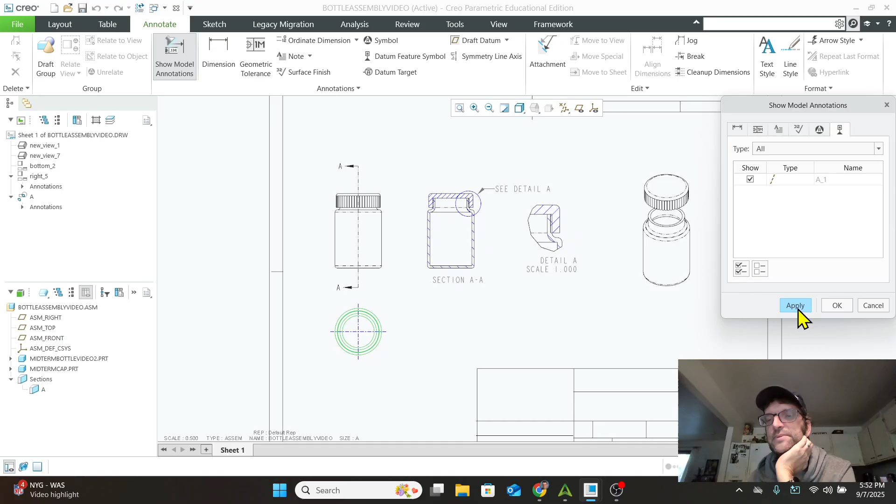All right. So center mark on our bottom view here. To do that, we're going to go to show model annotations under the annotate tab. Click on there, click on that bottom view. Make sure we check that center mark here in this panel. It comes up, hit apply, and close that out. Then we got that one.

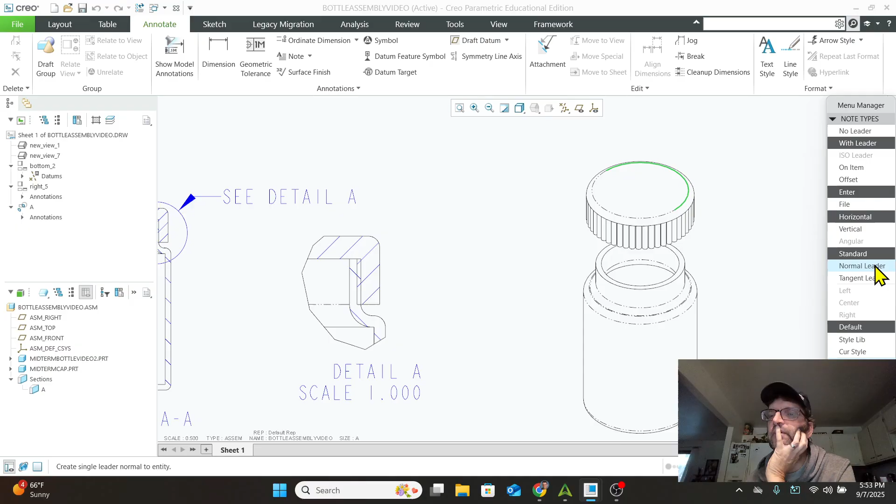And then the last thing that we need to do is we need to go ahead and add some balloon notes. So we're going to enter a balloon note with the leader. And we're going to click on the part and hit. It'll be a normal leader. Annotations, balloon note. Do an arrowhead. With the leader. Default. Normal leader. Done.

All right, so to add those balloon notes on there, we're going to go into annotate. Annotate, we're going to choose under annotations, balloon note. And then we're going to choose some options. We're going to do with leader. It's going to be horizontal. We're going to enter the information. It's going to have a normal leader on there. We're going to leave default style. We're going to click on make the note. I'm going to click where.

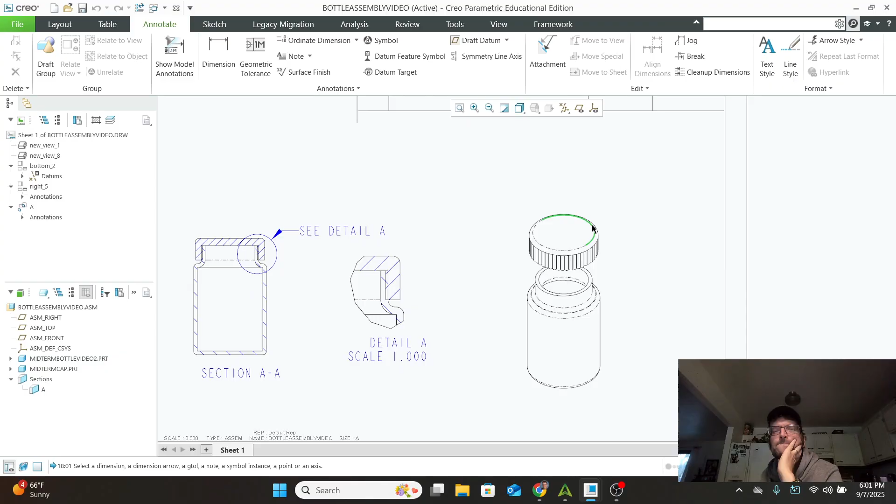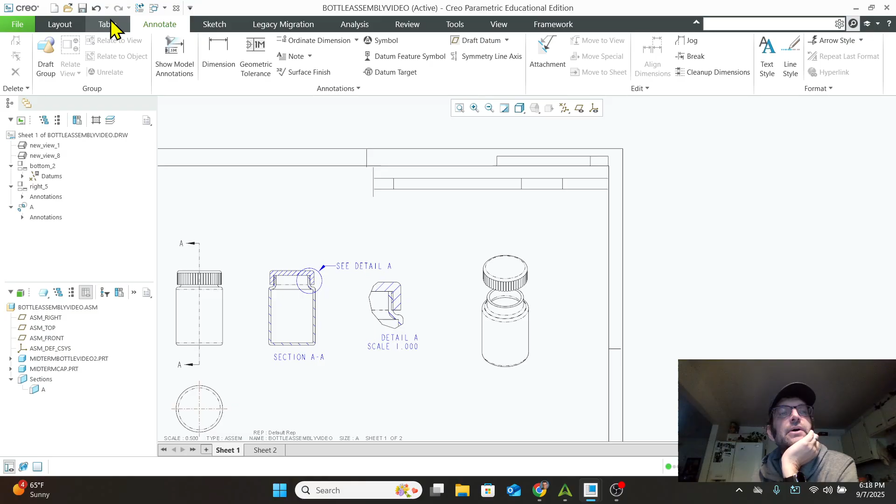So adding the balloon notes, we're going to have a choice to go to either under annotate. We can find balloon notes under annotations. Or if we go preemptively to table and grab a balloon note under the table tab, under balloons over here, we do balloon note. We're going to leave these options with leader, enter, horizontal, normal leader, click on make note.

We're going to click on the location of that thing. And then we're going to click again the location for that note. And then we're going to enter what that's going to be. This bottom part's going to be a 1. We're going to check mark twice. We have that. We're going to hit done. We can come and grab that and move it off of there a little bit.

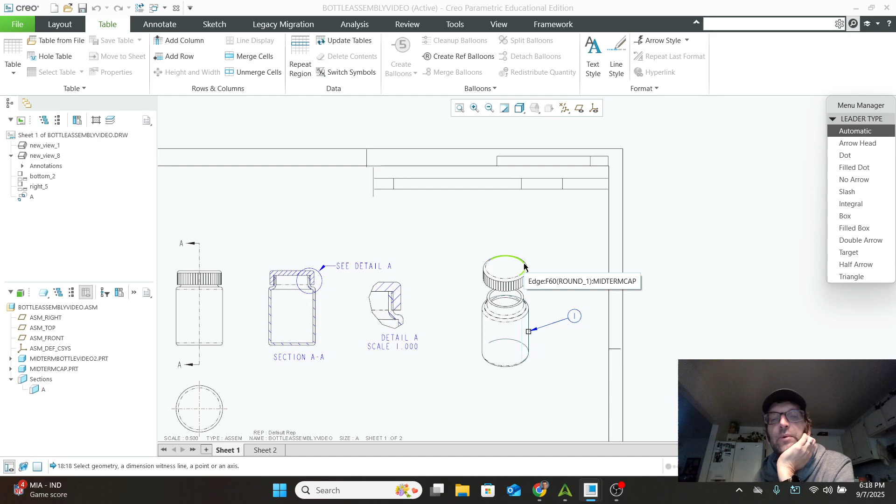So let's do that again. So balloon note. We're going to click on make note. We're going to pick where the leader is, so where that arrowhead is, and then where the note is actually going to be. There's a second click. That's going to be a 2. We're going to left click the check mark, left click the check mark again. Click on done. Then we can grab a hold of this and bring it out.

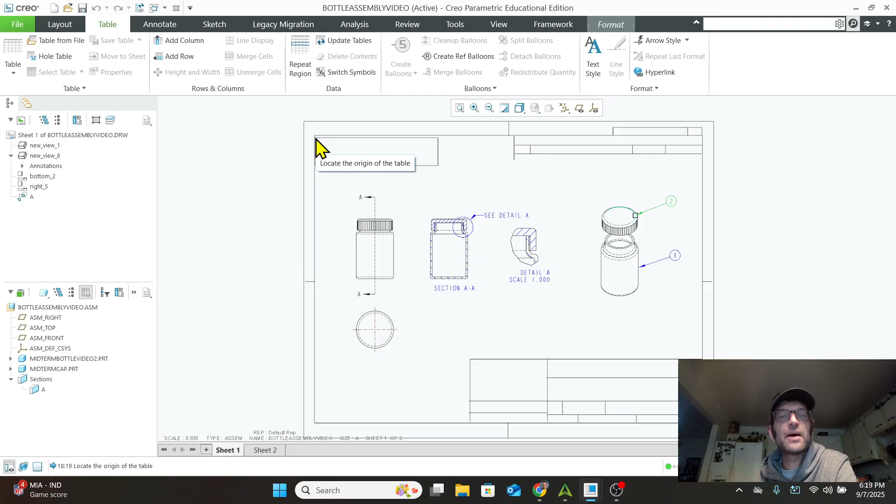All right, so we have our numbers on our parts, but we don't have a bill of materials yet, nor do we have our name in here. So let's get the bill of materials done. So in the table menu, we're already in there. On that tab, click on table, and we want to create a 3 by 3 table, 3 rows, 3 columns. And we're going to drop that in right here. And then like on our example, we're going to grab this right here. And we need to have item, name, quantity across the top.

Item, name, QTY, there we go. Second row, our item is going to be 1. Second item is 2. Quantity of each of those is 1. And we can do this automatically in Creo, but with something that's as simple as this with just 2 parts, it's just easier to go ahead and put it in manually. So part number 1 is just going to be the bottle. 2, just double clicking to get into another field, is going to be the cap.

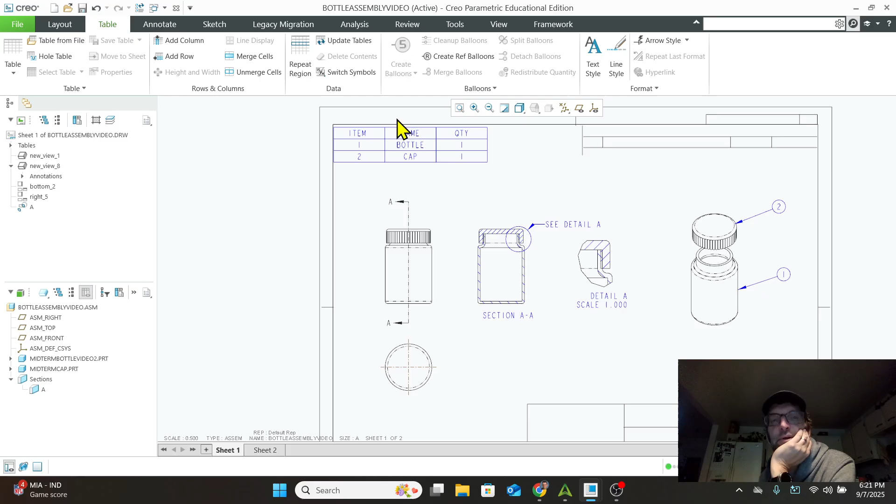And let's see, alignment wise, what is this set up as, centered on our example? Everything's centered on there, so let's do it that way on this one. So let's go ahead and pick the whole table and choose centered on everything, center alignment. There we go. All right, so we have our table. And on our parts, we have balloons on our parts. What is the last thing we need to do? We need to create another unattached note.

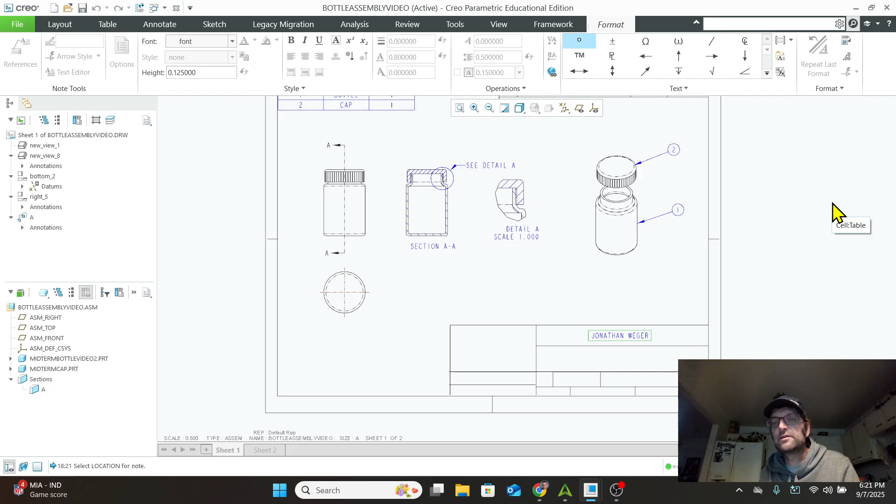So we're going to go to annotate. We're going to go to note. And we're going to do an unattached note. We're going to click right here to get our name in here. And please put your name on here, not my name. It doesn't help me out a whole lot to tell what's your work versus, I know what mine is. I need to know what yours is. Let's go ahead and get that note in there.

And if we want to make it nicer, we can go ahead and do that. Let's make that font a little bit bigger. Let's make that 1.5. 0.125, right? 0.15. So 150 thousandths tall. And I think with that, we should be good. Let's get this centered up. Let's double check and look at our example. Make sure we're not missing anything. We have the detail. We have the bubble 1 and 2. We have our parting line shown and labeled. We have our name. We have our center mark.

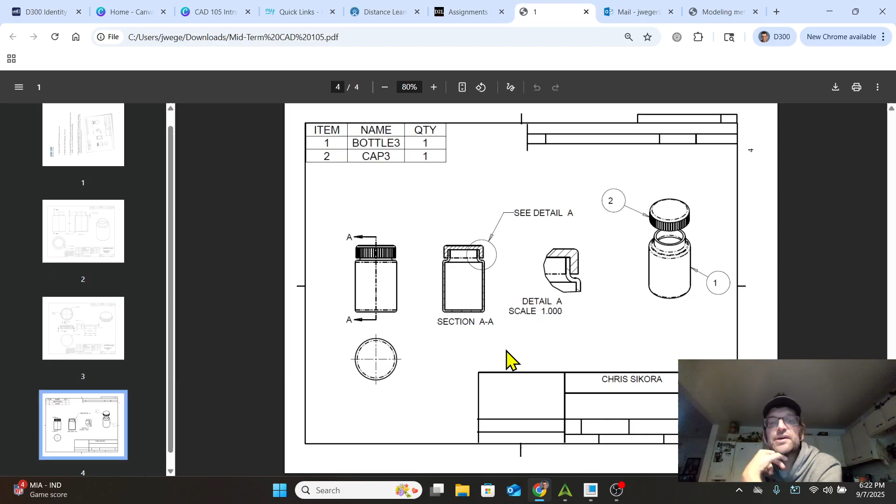And with that, the only thing that we need to do is just go ahead and print that thing out. Create a PDF of that. Save that in our midterm folder. Weger midterm. Save it. I'm going to go and open it up just to make sure it's good. There we go.

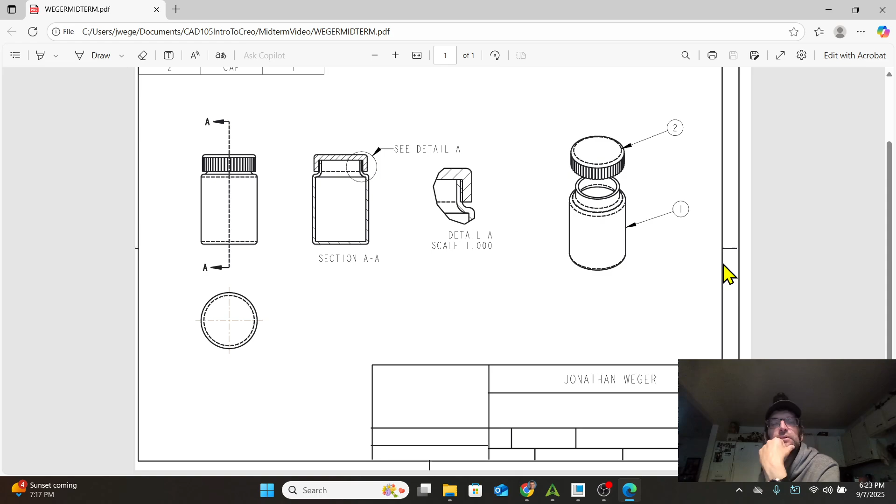All right, so make sure that you submit the following things for this one. You're going to need to submit the PDF of this. Okay, that's your 100 points there. We need to also submit your part file for the cap, your part file for the bottle, and the assembly file for the assembly of the bottle and the cap together. Okay, I need those 4 things, all 4 things submitted. Bottle is 50 points. Cap is 50 points. Assembly is 100. And the drawing is 100. So it gives you a total of 300 points.

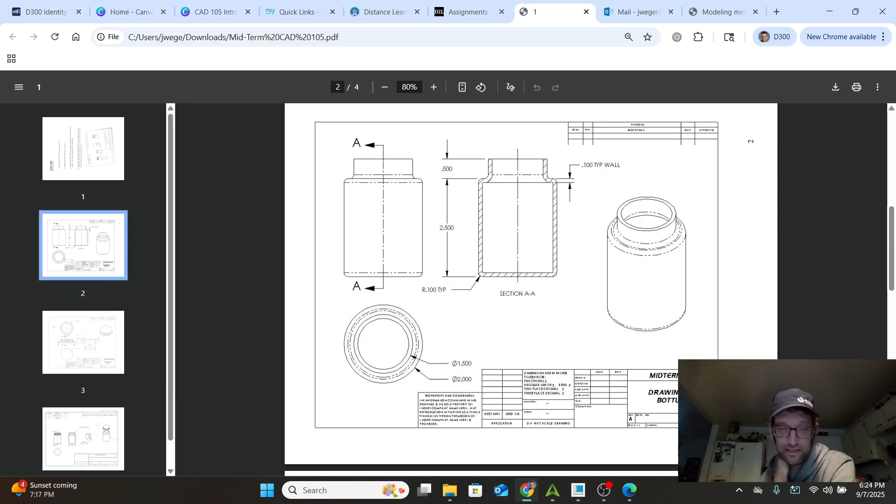Again, it's due this week, coming up on Saturday. If you need help, stop by. Office hours Tuesday, 3 o'clock until 4:30. Link is on the first page of D2L. If you need to get there, come on by and see me.